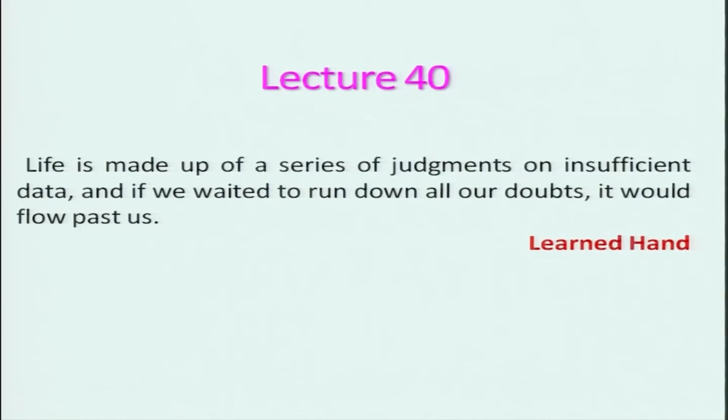In the last lecture, we looked at the governing equations for laminar and two dimensional unsteady flow, and later steady flow. We also looked a little bit about boundary layer very briefly. I would suggest we may not use it much in our course, but you should still have some feeling for it.

We also derived the one dimensional governing equation for mass mixture fraction, which is basically a conserved scalar.

Those equations are valid for laminar flow. Keep in mind we will also have to deal with turbulent flow. Laminar flow means the flow is layer by layer, as shown here for flow through a pipe. That means there will not be any mixing across the layers. Whereas in turbulent flow, the flow will not be layer by layer, it will be intermingling with each other.

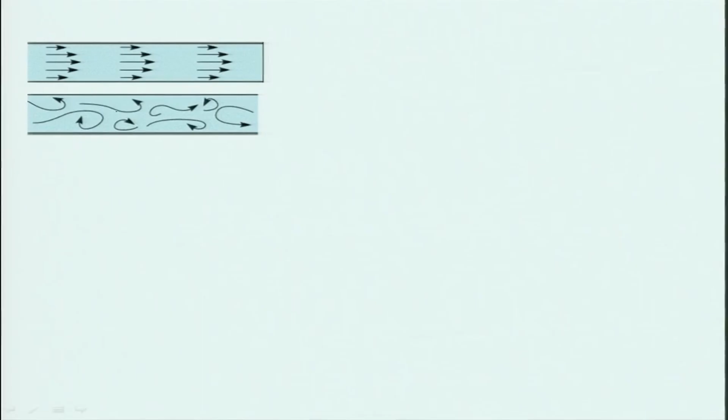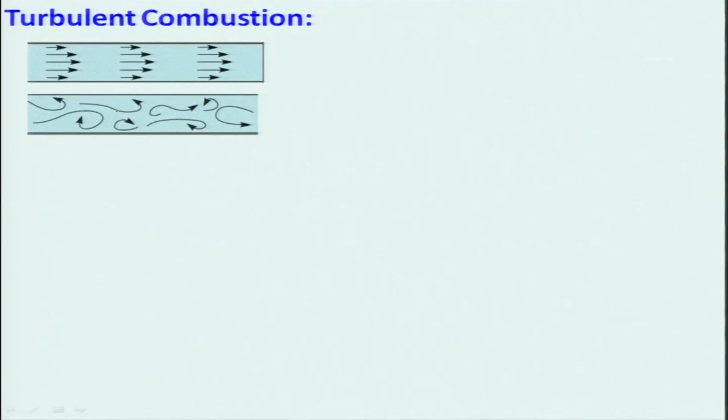So we need to look at that, and turbulent combustion plays a very important role, because most combustion devices are basically turbulent in nature, except for a few exceptional cases.

For example, if you consider an LPG burner, is it laminar or turbulent combustion? It looks to be laminar. But if you look at a candle light, is it laminar, turbulent, or transition? It will not be laminar, it will basically be transition.

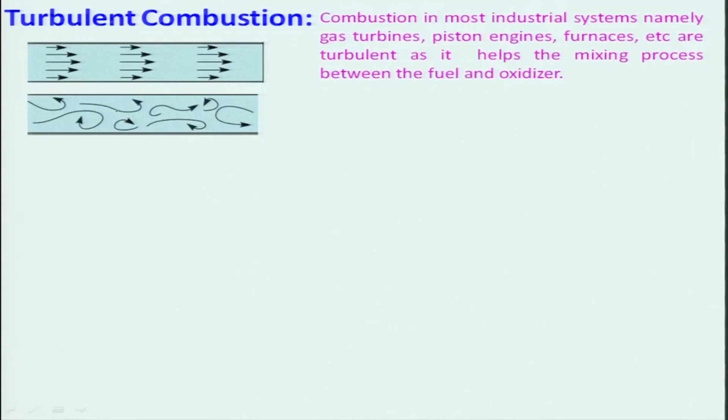Most combustion systems in industries, namely gas turbines, piston engines, furnaces, etc., are turbulent, and turbulence helps in the mixing process between fuel and oxidizer.

Why go for turbulent combustion? Not only for mixing, we want a high rate of heat release. That means mixing should be as fast as possible. Therefore, we need to go for turbulent combustion.

If you look at this internal combustion engine, this is the combustion taking place, and it is intensely mixed, meaning the combustion will be turbulent.

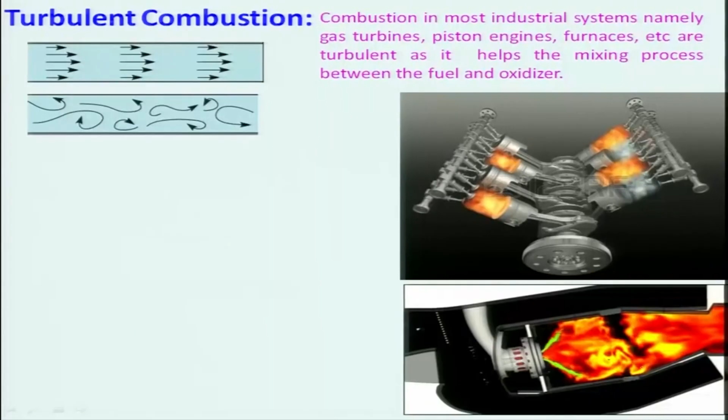This is a gas turbine combustor, where a lot of mixing is going on, and there is also some injection of fluid, like secondary airflow, coming in.

Let us look at this coal combustion, which involves pulverized particles, and combustion is taking place. You could observe the characteristic features of turbulent combustion here.

Let us look at a combustion from a bluff body, stabilized flame. You might know that a bluff body is avoided in fluid mechanics. Always you want to have a streamlined body in aerodynamics and other places, but in combustion we use a bluff body, because we want better mixing. What is a disadvantage in fluid mechanics becomes an advantage here.

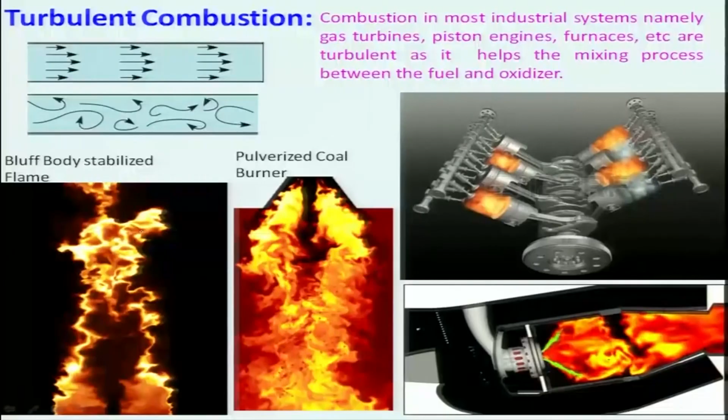This combustion taking place is quite convoluted and turbulent in nature. Therefore it is very important to look at the fundamentals of combustion. I will only be touching upon certain terminologies we may use, not getting into too much detail.

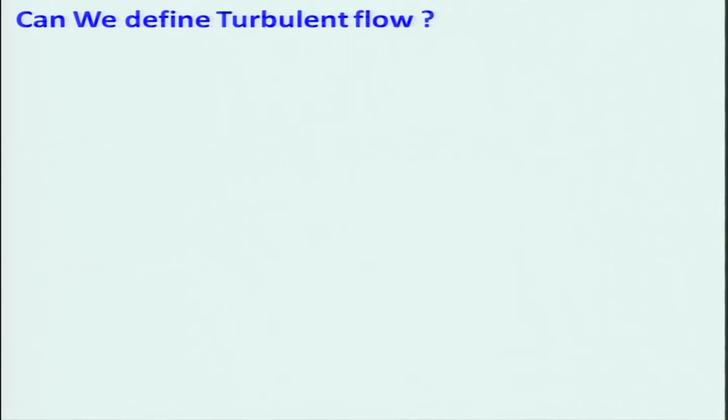Can we define turbulent flow the way we define laminar flow? How do we do it? There will be some characteristics: the flow will be layer by layer, and then we can say whether it is laminar or turbulent. But can we actually define turbulent flow?

We use viscosity, diffusivity, mass diffusivity or molecular diffusivity, and other properties of the fluid. These differ depending on the fluid, for example air has a different viscosity than water. But can we really define turbulent flow? You cannot really define turbulent flow, you can only describe it.

And now, how will we describe the turbulent flow? That means we will have to use some characteristics. What are those characteristics? Any idea?

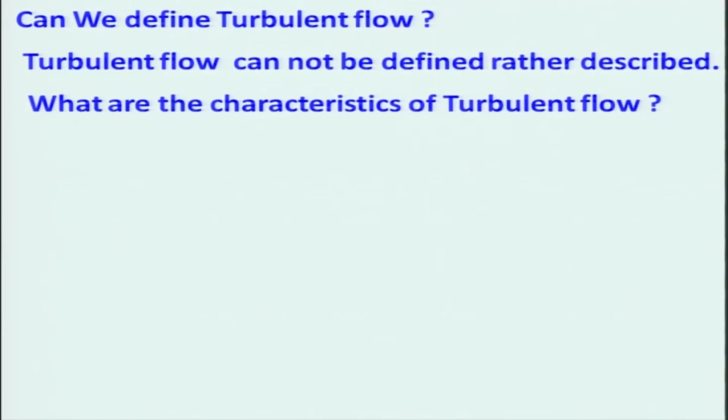It will be irregular, right? The flow will be convoluted, it will be mixing, that means there will be intervening of the fluid element or the bulb which will be taking place. The molecules will be moving here and there, and some fluid packets will be moving up and down in the adjacent layer.

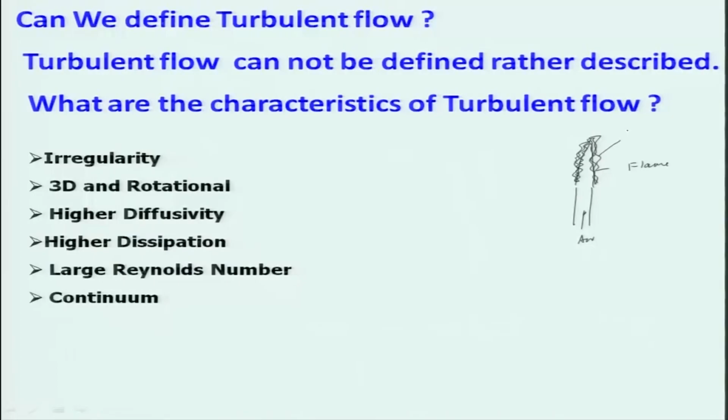As a result, if I consider a jet, let us say this is my air jet and there is a flame here. If it is laminar, my flame will be looking like that, some particular shape, but if it is turbulent, it will be like that, intermingling surfaces, and this is each one of these instantaneous contours.

Contours of flame. So this will be here my average flame surface, and these will be very irregular in nature. But if you say, look, I have taken a photograph of the flame and it looks to be very smooth, it is not, because it will be averaging out, you will not see it unless it is highly turbulent.

And this flow will be 3-dimensional in nature. You cannot say I will consider 2D. It will be 3-dimensional and rotational. Rotational means the fluid will be rotating - is inviscid flow rotational or irrotational? That will be irrotational, right. But here it will be rotational. You cannot really consider inviscid, then turbulent. Can you consider? No, no.

And as a result, there will be higher diffusivity. What do you mean by that? We have seen various diffusivities like conductivity, thermal conductivity, molecular diffusivity, and viscosity. These are all diffusivities. So those will be much higher than the molecular one. It will be diffusing, moving around, intervening kind of things.

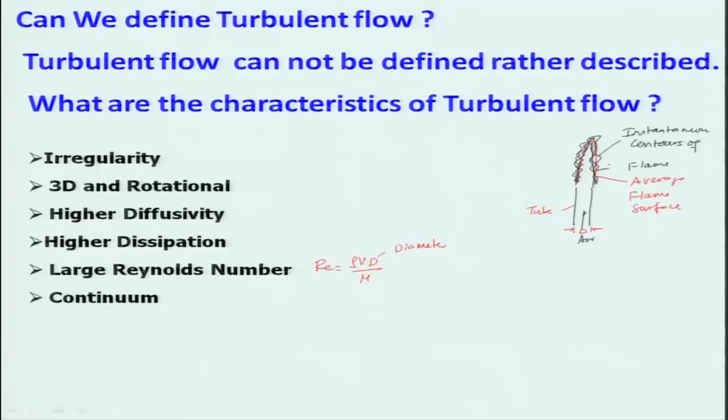And now, how to deal with that? Because as I told, in this image or this flame, the flame surface or the velocity or the temperature or the species, mass fraction, will be all changing rapidly with time. Now how we will deal with that is the question.

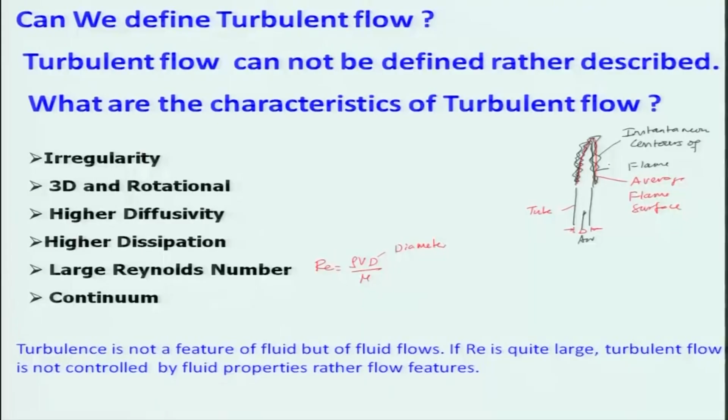Before doing that, let us look at how we can describe it. Basically, as I told, turbulence is not a feature of the fluid. I have already told you, diffusivity, molecular diffusivity, conductivity, and viscosity - these are all properties of fluid, not properties of the flow.

And keep in mind that if the Reynolds number is quite large, of course not in the transition regime, the turbulent flow is not controlled by the fluid properties, rather by flow features - it will be how the flow is. And now we will be looking at how we will take care of some of the terminology. So, at high Reynolds number, properties like velocities, temperature, mass fraction exhibit random variations. Now how will we deal with it?

Because if it is varying randomly, then we will have to use some statistical tools, or we will have to make some average quantities. Keep in mind that eddies move randomly back and forth across the adjacent layer. Let us say there is a bulk fluid which is moving, but in between it will also be moving the fluid elements, unlike in laminar flow, where the flow will be moving very nicely.

See, if you look at turbulent flow, you can look at the traffic in Kanpur. All these cars will not be in a lane, they will not be following lane, they will be moving here and there the way they want. But if you go to a western country, the cars will be moving in their own path, taking a lane. So it will be laminar, but here they will be moving here and there.

So it will be losing a lot of energy, and also it will be causing some problem. But as a result of this fluid moving in a turbulent or chaotic way, I can say all turbulent flow will be chaotic, but all chaotic flow need not be turbulent. There will be enhancement of mass, momentum and energy transfer rates, and that is why it is being used.

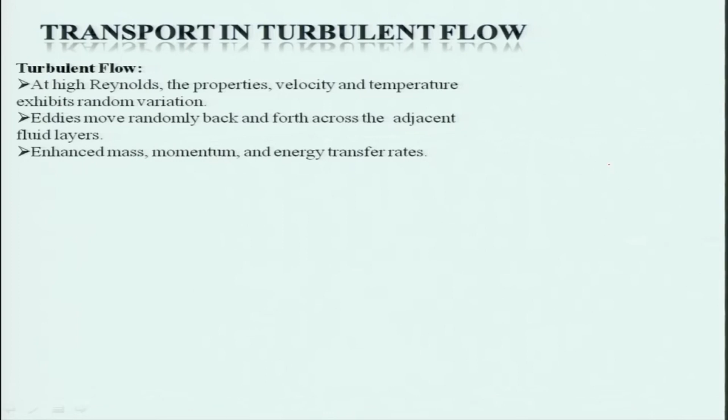Now let us look at a velocity profile, velocity fluctuation along with time, Vx. If you look at this, this is your average velocity Vx, and this is Vx at any instant of time. If I consider this as a straight line, at t naught, this will be Vx dash at t naught. At some other time instant it will be different. This is the fluctuating quantity, the maximum fluctuating quantity.

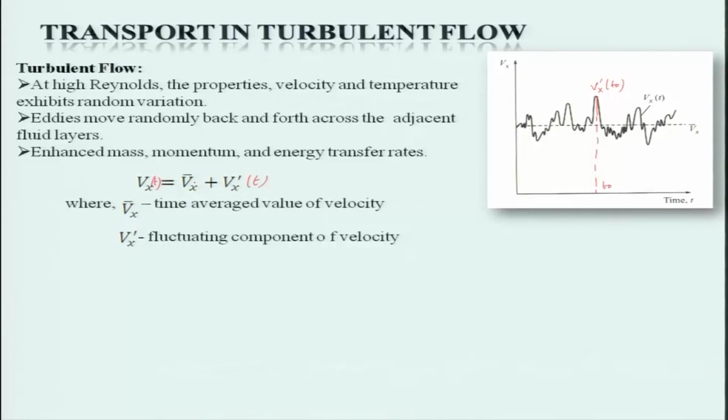That means I can write down that Vx at any instant of time is equal to Vx bar plus Vx dash, Vx bar is the average velocity along the x direction, and Vx dash is the fluctuating quantity. So what is this Vx bar?

If I look at it, that is nothing but 1 over delta t, integrated between t1 and t2, of Vx over time dt. If we integrate over a certain time, which is a very large time scale, not very small, you should not consider only a small portion, you should consider a considerable time. Then this is the average velocity, and there will of course be fluctuating quantities you will be looking at.

Similarly, I can also talk about pressure, P(t) is equal to P average plus P dash, and I can talk about temperature also, T plus T dash, and similarly mass fraction of species plus its fluctuating component. This is basically known as Reynolds decomposition, having two components, one fluctuating, the other average quantities.

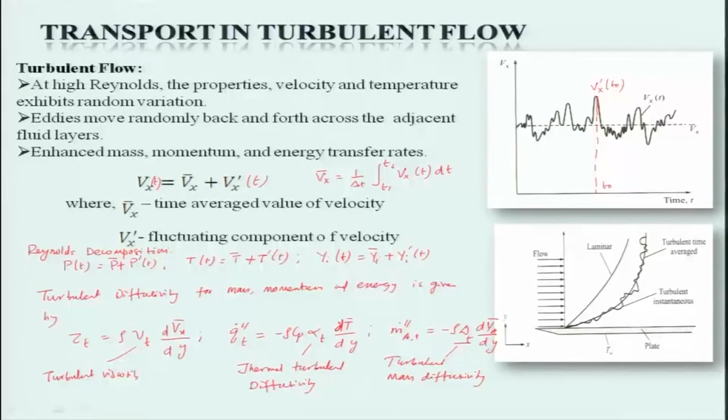We will not be considering this in detail, but let us look at how we can describe these properties using various terms. Turbulent flow can be characterized by two quantities: one is turbulent intensity, and the other is the turbulent scale.

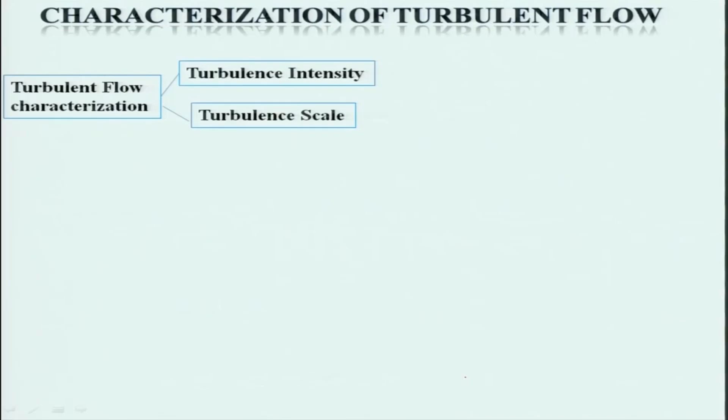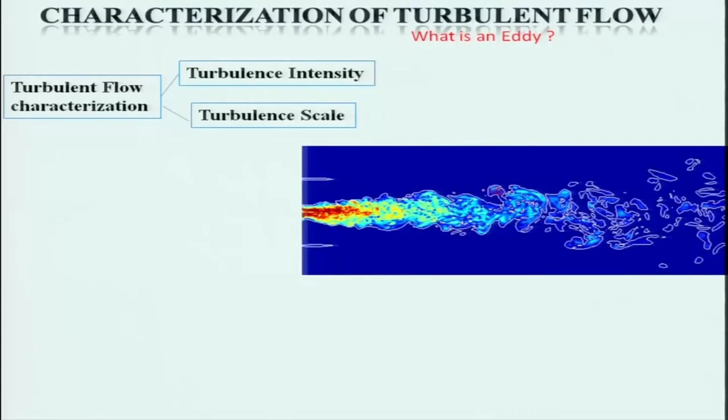So an eddy is considered to be a macroscopic fluid element comprising of eddies as a single unit. That means there will be some small eddies which will be rotating as a unit.

For example, if you look at, there will be various panths in the Sanatan Dharma. Let us say some group is talking about yoga, somebody is talking about bhakti. They are also having some kind of thing, they will be rotating, moving around, but they will be similar in nature. So that we call it as eddies.

Are you getting? That means some fluid element will be moving - let us say in this bulb, I can consider as this one - they will be moving, rotating, and intermingling, intertwining, but they will be in a group doing this, and that is known as an eddy.

And as I told, the vortex embedded in flow - this is basically a vortex which is embedded in the flow. Vortex means which will be rotating.

And the intensity of the turbulence is basically a measure of violence of eddies - how fast it is moving, so that energy is transferred. So that is known as turbulence intensity, and turbulent intensity will be dependent on what?

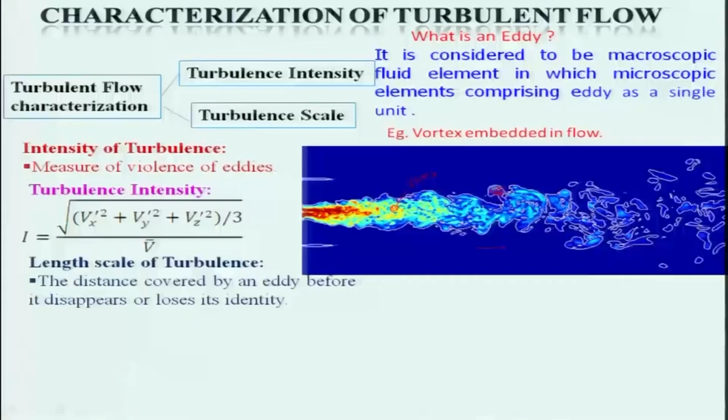If it is going with respect to time, let us say it is moving, when it moves then it loses its identity over time. So that is the length scale - how much distance before it loses its identity, the distance covered by an eddy before it disappears or loses its identity. In between it will be keeping its identity, and that distance is known as the length scale.

Length scale is divided into basically four. One is macroscopic length scale, which is the characteristic width of a flow. Let us say if it is a pipe flow, what would you use for the macroscopic scale? L will be basically d, the diameter of the pipe. And there is the integral scale L naught, the Taylor microscale, and the Kolmogorov length scale.

Keep in mind this is mechanical - we use this macroscopic scale for laminar flow, we always use rho V D by mu to find out Reynolds number. But in turbulent flow you will be using different scales to find out different kinds of Reynolds number.

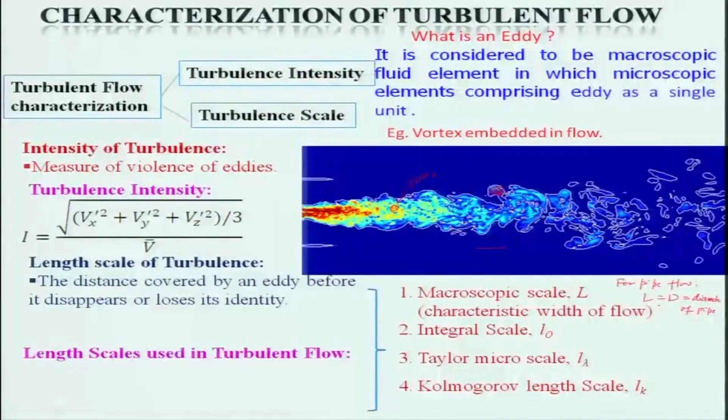Keep in mind that these scales will be changing, because the eddy's size will be changing, and the time and distance it will be moving before losing its identity will also change. So scale will be changing, and keep in mind there is a cascading effect, meaning larger scale eddies become smaller and smaller. The lowest one will be the Kolmogorov length scale, which is the dissipation scale, because it will be dissipated - the very smallest scale, the Kolmogorov microscale.

So let us look at what we call the integral scale. L naught, as I told, is the integral scale, and this basically represents the distance between two points in a flow where correlation between the fluctuating velocities at the two locations ceases - that means there will not be any correlation between them.

For example, if there is a fluid element having some velocity fluctuations, and there is another point at some distance, let us say distance r. So this will be moving with velocity Vx at position 0, and this will be Vx dash at position r. That means there will be some correlation between the two, and that distance will tell you the integral scale.

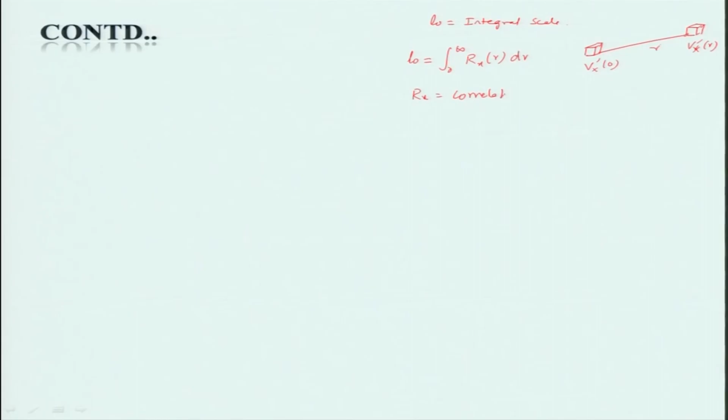So L naught, the integral scale, I can write as the integral from 0 to infinity of Rx(r) dr, where Rx is the correlation coefficient. As I told, this is basically a function of the distance between which the velocity fluctuation will be losing its identity.

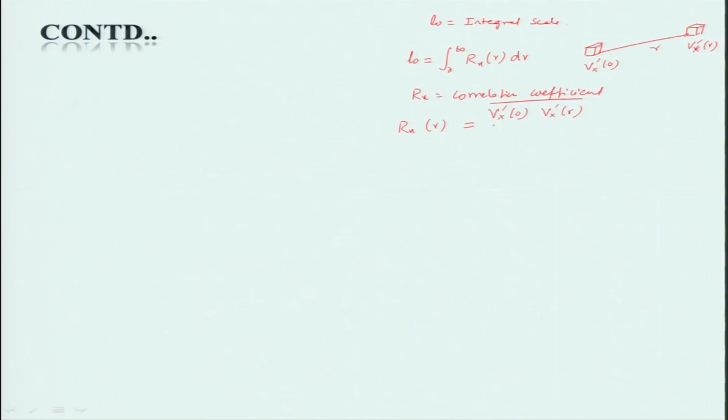So I can define this Rx: R is basically Vx dash at r equal to 0, and Vx dash at R, averaged over both, divided by Vx RMS dash at 0 and Vx RMS dash at R. So this is basically the correlation coefficient which you need to look at to define the integral length scale.

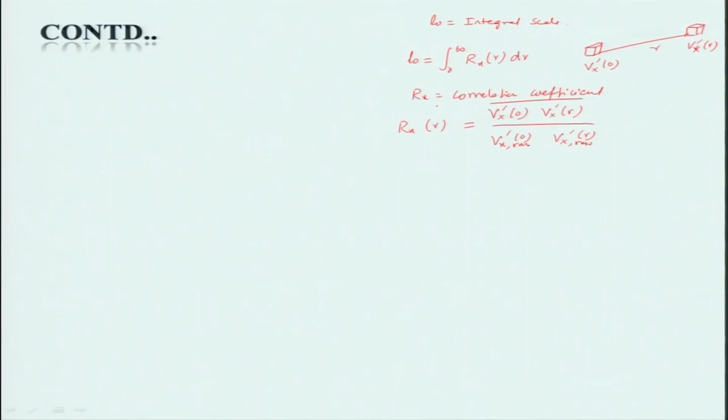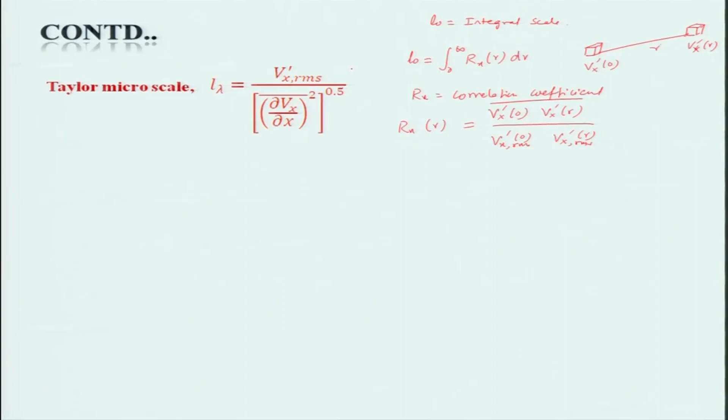Similarly, in another way we can talk about the Taylor microscale, l lambda, which is nothing but Vx dash RMS divided by the average of (dVx by dx) squared, which is known as the mean strain rate. This is basically the mean strain rate, and dividing by that will give you the Taylor microscale.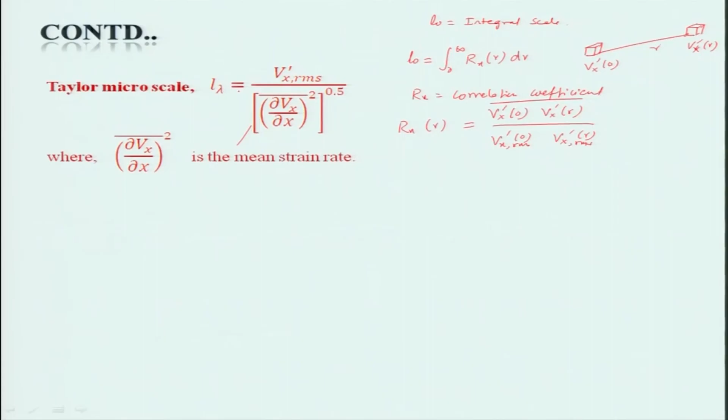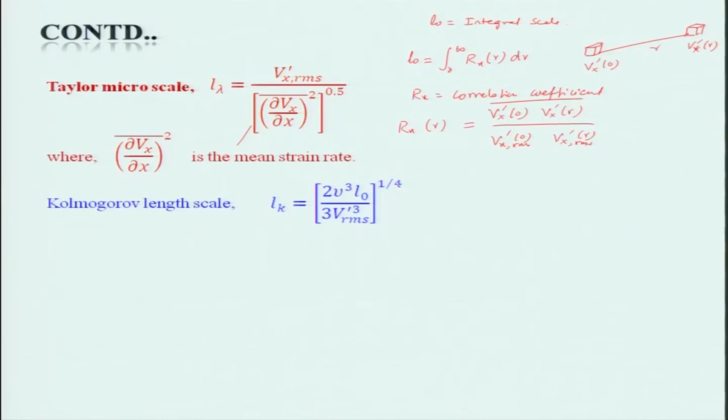And the Kolmogorov scale is (2 nu-cubed L naught divided by 3 V RMS cubed) to the power 1 by 4, and this comes from order of magnitude analysis people have come up with, and this is related to the integral length scale L naught and also V RMS. This nu is basically the turbulent viscosity, you can call it T.

LK, as I told, is the smallest vortex that could be present in the turbulent flow. After that what will happen? It will be dissipated - it will lose its identity altogether, meaning all the energy carried by this vortex will be lost. Are you getting this? These are all packets of energy carried by the vortex, which we call eddies.

Now, based on this you can define various kinds of Reynolds numbers based on these scales. The turbulent Reynolds number based on the length scales is REL, based on macro scales - macroscopic scales - V RMS L divided by nu, which is generally what we call Reynolds number in laminar flow. But in turbulent flow, depending on the situation, we use certain cases; this is the Reynolds number based on the integral scale, the only difference being that you use L naught and V dash RMS.

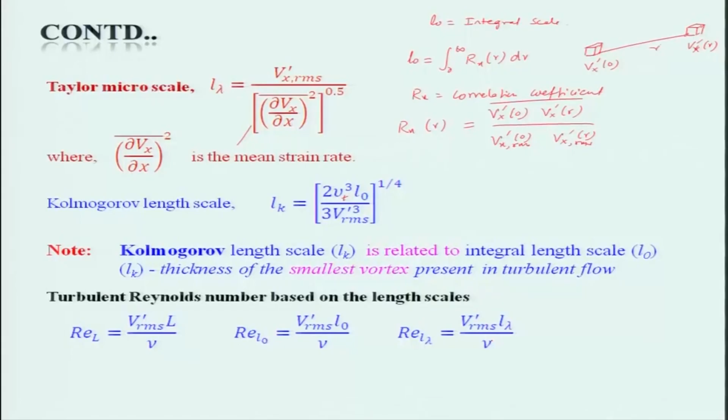RE L lambda is nothing but V dash RMS times L lambda divided by nu, and RE LK is nothing but V dash RMS times LK by nu. Keep in mind that V RMS is the characteristic velocity considered in turbulent flow, which is the root mean square velocity - this is the characteristic root mean square velocity.

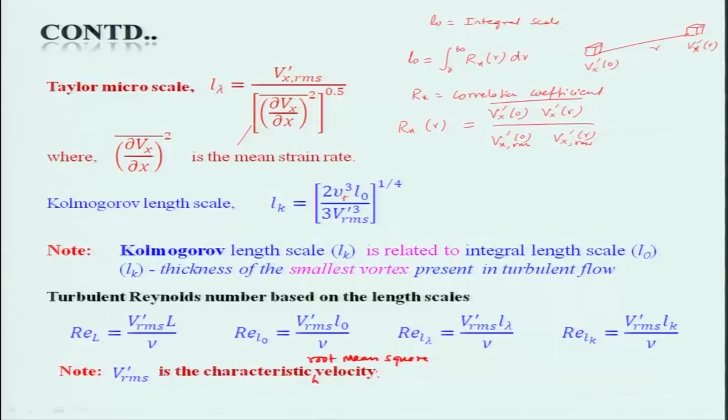So with this brief introduction about turbulent flow, I will stop here. In the next lecture we will be discussing combustion. Keep in mind that we will have to look at some of these terminologies whenever we go for turbulent premixed flames. Thank you very much.